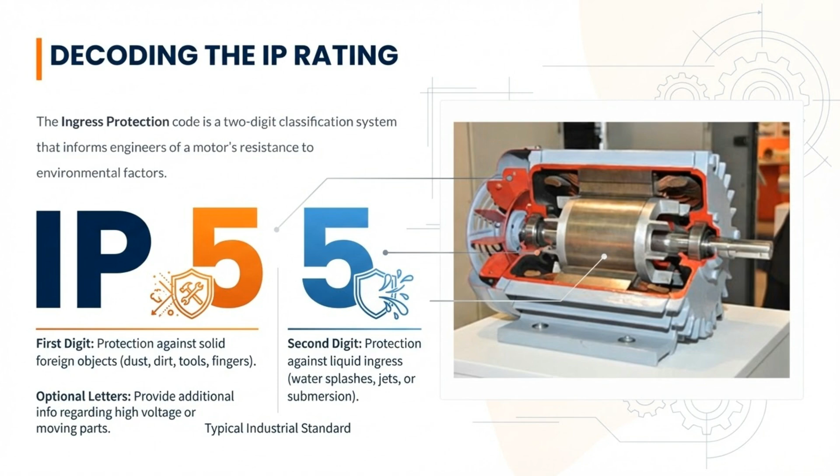The IEC 60529 standard provides a numerical scale to define the sealing effectiveness of electrical enclosures. This standard protects against foreign bodies and moisture. The Ingress Protection Code is a two-digit classification system. The first digit indicates protection against solids like dust and tools. The second digit indicates protection against liquid ingress, such as water splashes or submersion.

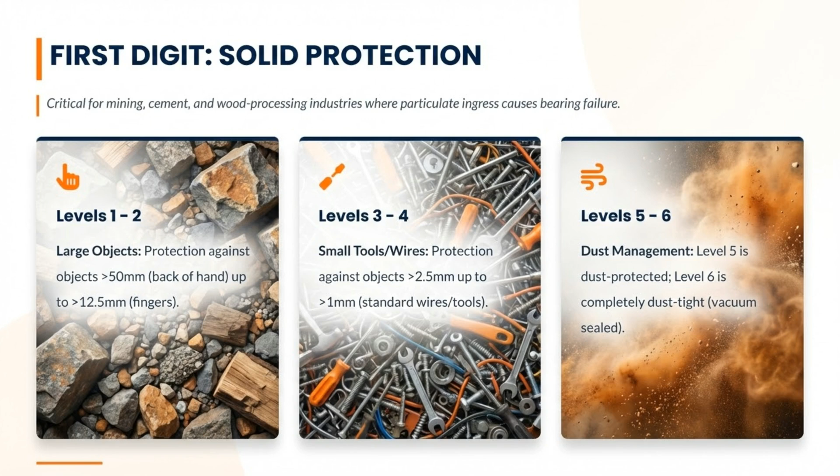The first digit defines solid protection. Levels 1 to 2 protect against large objects. Levels 3 to 4 protect against small tools and wires. Levels 5 to 6 cover dust management, with level 6 being completely dust-tight.

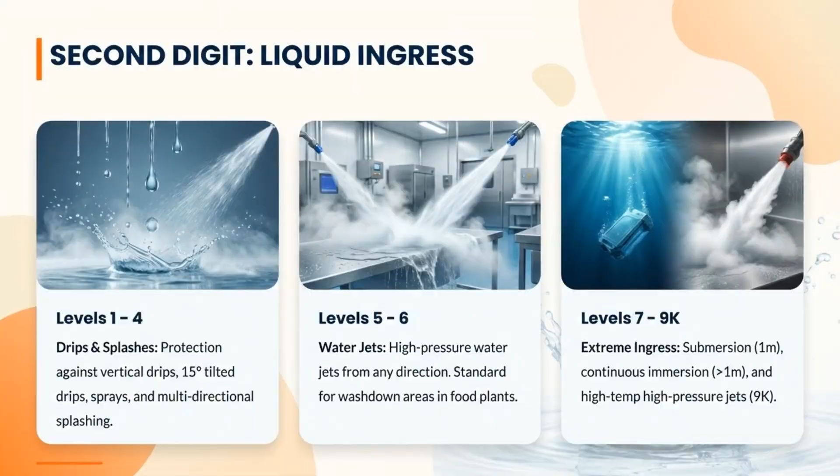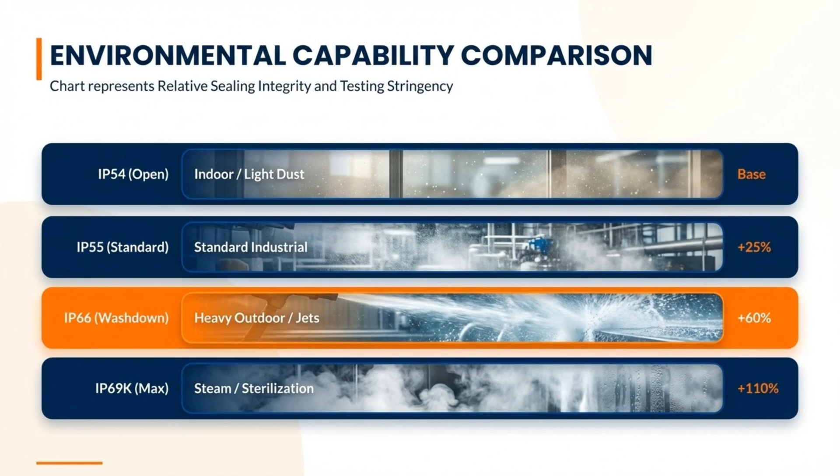Comparing environmental capability, IP54 is typical for light indoor dust. IP55 is standard industrial use. IP66 is necessary for heavy outdoor use or washdown, while IP69K is required for steam and sterilization applications.

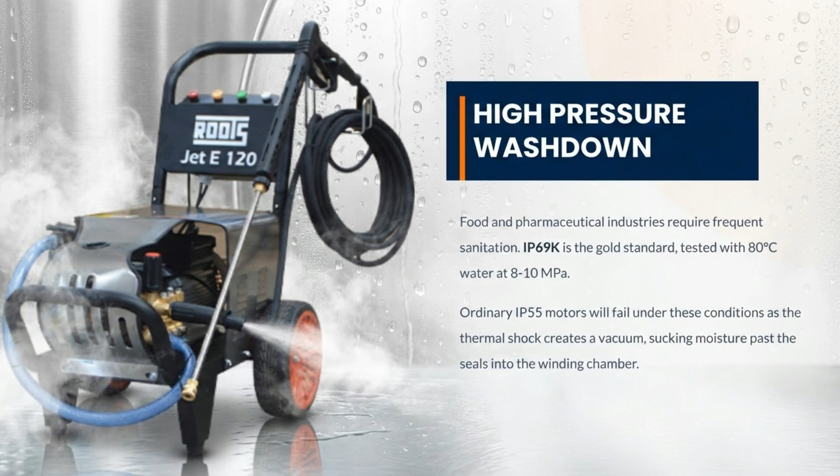For high-pressure washdown in food and pharmaceutical industries, IP69K is the gold standard. It is tested with 80 degrees Celsius water at 8 to 10 megapascals. Ordinary motors will fail due to thermal shock, which sucks moisture past the seals.

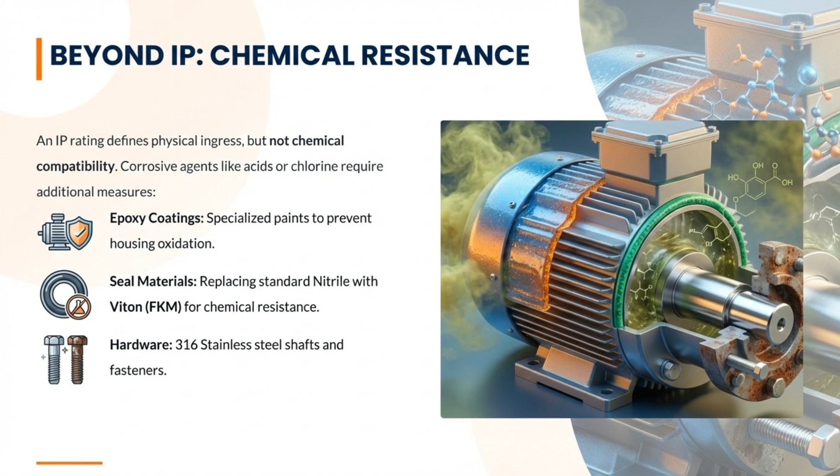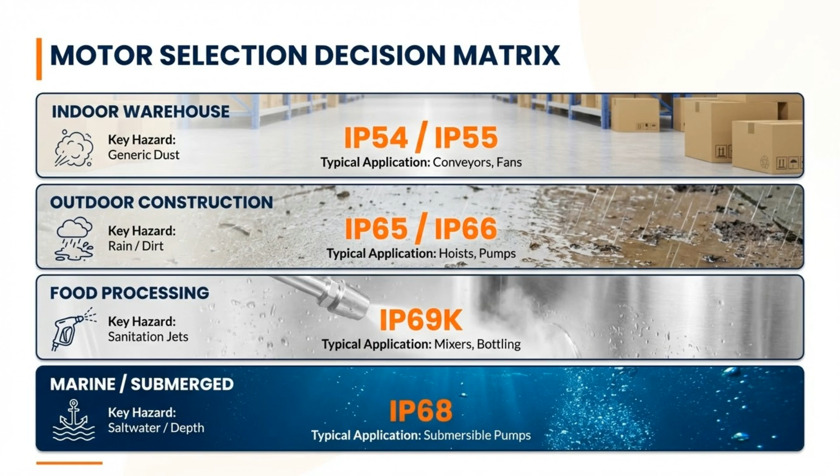Selecting the right motor depends on the environment. Indoor warehouses typically need IP54, IP55. Outdoor construction requires IP65, IP66. Food processing demands IP69K, and marine submerged applications require IP68.

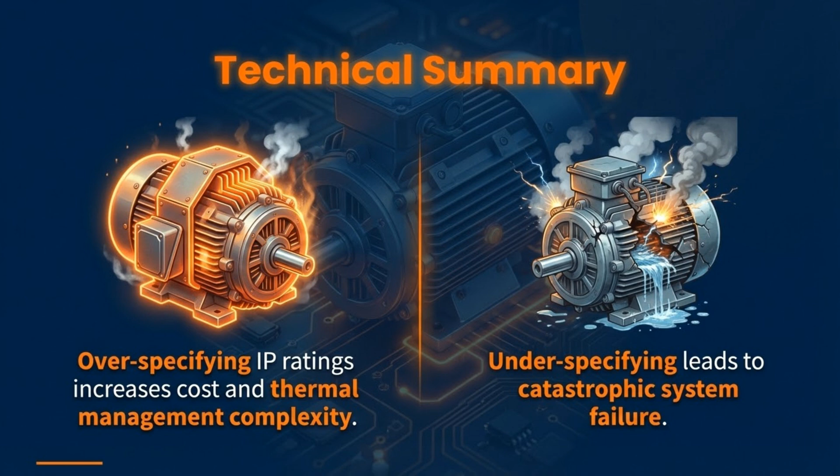In summary, overspecifying IP ratings increases cost and thermal management complexity. Conversely, underspecifying leads to catastrophic system failure. Selecting the correct IP rating is critical for reliability.